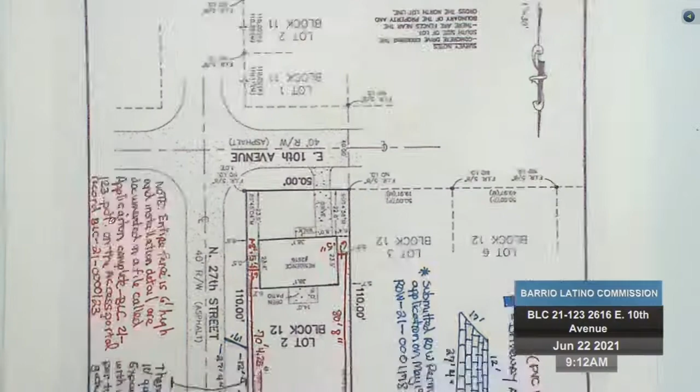So are you guys able to see this? Can you move it up? Yes. Maybe I can do this right here.

Okay, so this is a survey that I submitted as part of my application, and it indicates in red where the existing fence is and where the new one's going to go, right in this place. You can see it's well inside the property line.

On the 110-foot side at the top, that's within the property line. There's another house right here, they do not have a fence, it's just my fence there, so that's also inside the property line. On the 27th Street side, the request is for it to also be inside the property line with the proper allowance for the easement.

The fence is standard, 6 feet high. I understand you can't do anything higher in that neighborhood residentially, and I'm okay with that. There's an existing gate, as Mr. Vila pointed out, that is about 110 pounds and has a couple wheels on the bottom, so moving it in and out is very difficult. I have a small recreational vehicle in the back, and I'm trying to get access to that from this street right here.

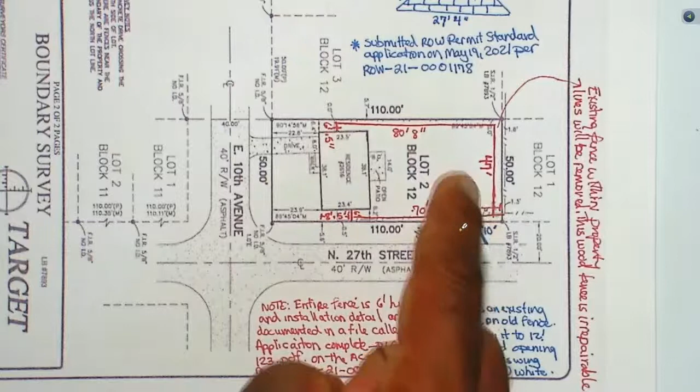So it's an existing opening, and I'm trying to enhance it with a better looking fence. Also, part of my application is to put in a driveway apron right there. As of right now, it's just grass and dirt on the easement.

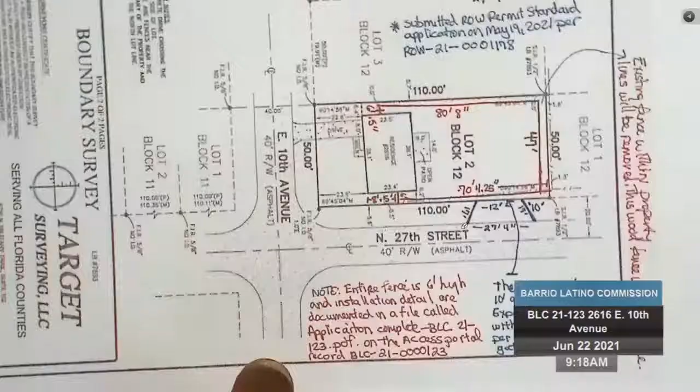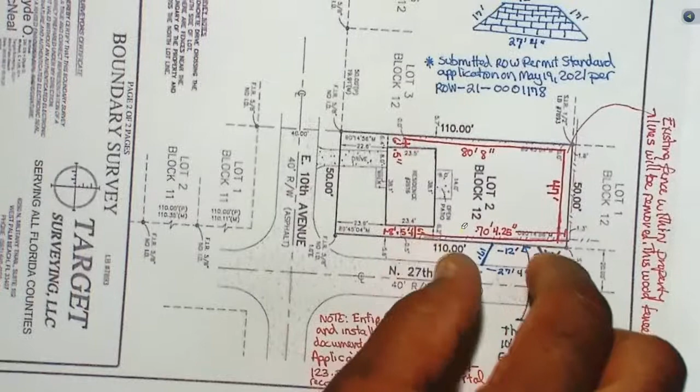The fence that's already installed would be here, coming off the house right here. This section is done, this section is done, and this section, about 8 feet, is done from the house coming out this way. Out of the 70 feet, 4.25 inches, about 60 feet of it is not done, and that includes the existing gate as well.

Okay, question. So this started 3.5 years ago, it's been that way, and you just kind of ran out of money to finish that last section and replace that wood fence section and gate that goes there to access your backyard? It's pretty deteriorated. Yes, sir, yes, sir, okay.

And once again, I was just unaware that I needed this type of approval, so I apologize for doing the work, but I just became aware of it by a notice that I needed approval, so that's why I'm here. Okay, and it looks like from your documentation that you submitted to the city for the permit to do the fence, but it just didn't go into the Barrio for review.

Right. Would you like to talk about your curb cut, the apron there that you're proposing, while you're at the mic? Yeah, absolutely. I'll put the survey back up. By the way, this does provide an illustration of where that gate is right here, the heavy one that's hard to move. This is where I'd like to put the driveway.

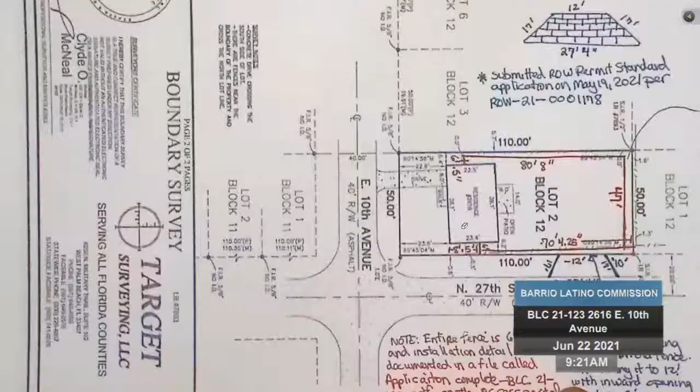And so from the survey here, you can see in blue down here, there's an existing 10-foot gate on the old fence, and I'm asking to expand it to 12 feet, so I will have 2 6-foot gates that will open. Should they open on the ends?

How do I have it here? The swing, 2 6-foot swing gates, and you guys tell me if I need to have it open from the inside or the outside. I think to the inside, but you guys will let me know. And then install an apron there.

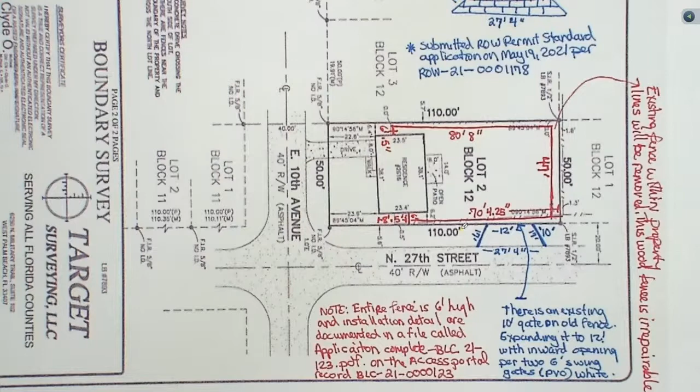The materials of the apron, I'm not committed to. If the commission requires concrete, I'm happy to put in concrete, I'm not stuck to pavers. It just was a more economical way to do it. But if I need to spend more to put concrete there to keep with the aesthetics of the neighborhood, I'm okay with that.

I've also requested a right-of-way permit for this driveway. I think they're requiring more details from me, such as a traffic site plan and other things. So that's in progress right now, that right-of-way permit to install that.

2013? I think, don't quote me on the date, but yeah. I thought it was fairly recent, but not in the last couple of years or anything.

Sir, how long have you owned the property? This will be 6.5 years. I bought the house about 6.5 years ago. So you're probably right around the same time it got annexed.

Okay, thank you. No, Rich asked most of my questions. All right, fantastic, and I have no further questions as well. So you've responded as the other commissioners asked their questions, but you have 5 minutes for rebuttal if there's anything else you'd like to add. No, just thank you for hearing my case, I appreciate it. All right, thank you.

So now we will close the public hearing, and then the commissioners will close the case. There's a part where we're talking quietly amongst ourselves, right? Is that what we're doing? So there's a part of me, to me, this is a no-brainer.

We have allowed PVC to go in previously, because that wasn't the discussion around what's happening. It's a product that's being developed now. It wasn't developed at the time the guidelines were established. It looks nice, it looks sharp, he's permitted it, it's legal, that kind of thing. To me, this is a no-brainer. I would be inclined to do the cement versus the pavers on the cut. But yeah, that's kind of my take on it right now.

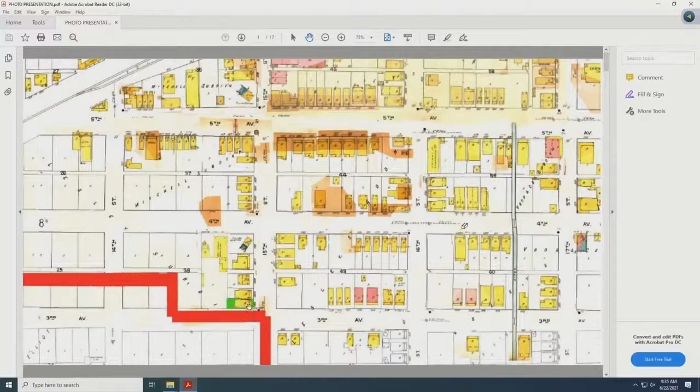Moving to the photo presentation, I always like to start with the 1929 Sanborn. You see the density here. This is part of our boundaries, showing that this is inside the local district of Ybor City. This is outside. The property in question is this small parcel here. To get a more global look, the red once again indicates the local boundaries. This is the one questionable property that we're looking at that is within the district.

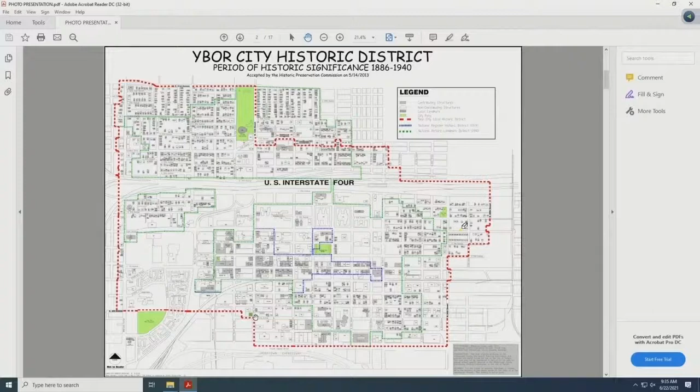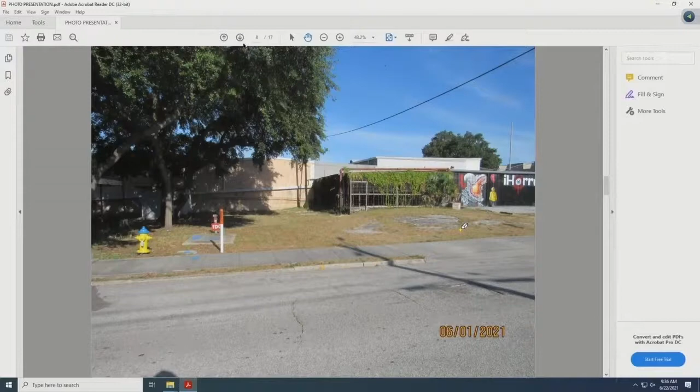Just a couple shots of the contributing structure that's there now. Looking at the surrounding area, this is to the north of that contributing structure, and a couple of structures to the south, so you get a feel for the environment. This is looking to the east. This is the dividing line — everything to the west of 15th Street is outside the district. This is to the east, inside the district. You see some outdoor storage and a Butler building, along with some contributing structures within the district.

These are some street shots. This is looking down 3rd Avenue to the west — the subject site is over here. This is looking to the east across 15th Street, again to get a feel for the area. This is looking down 15th Street to the north, showing the contributing structures I mentioned earlier. This is looking back into 7th Avenue, turning in the other direction. This is looking down 15th Street towards Adamo.

The property in question is here, and the dividing line of what's in the district is here. This is outside the district and part of what the applicant's going to show. Just to revisit, this is the contributing structure that's in the district, and these were the grouping of two little cottages also in the district. This was the dividing line down 15th Street — this is in the district, this is out of the district. But staff has some concerns since these abut the district line, so sensitivity is required. At this time, Tyler Hudson, the agent for the owner, will go through the presentation, and then I'll be back with some comments. Thank you.

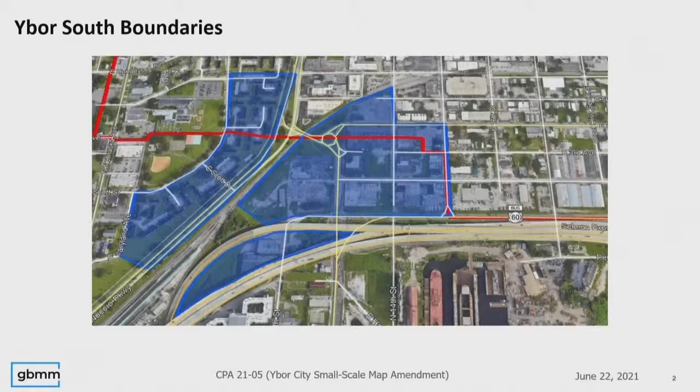But there are going to be many more hearings to come on this project. So that everyone has an orientation about where we are talking about, this is the general scope of the project. The portions west of Nuccio we generally refer to as the West Blocks. That's the site of the former Tampa Park Apartments. Those are subject to a filed rezoning that you'll have a recommendation hearing for sometime later this year. In the center, you'll see the Gasworks parcel, and to the east, what we sometimes refer to as the eastern parcels or the gateway parcels. In all of the map amendments we're talking about today, save for the one at the very south that's wedged between the expressway lanes, we're talking about the eastern blocks today.

Specifically, we're talking about the green outlined parcels. You can see the red is the historic district boundary, green are the parcels we're going to chat about. Just for organization, I'll talk about these as entirely separate. Number one is what is within the historic district. 2, 3, and 4 are varying degrees of outside, but I want to go parcel by parcel so this commission can understand what you can do now on this property under the comprehensive plan and what you could do if these changes are ultimately approved.

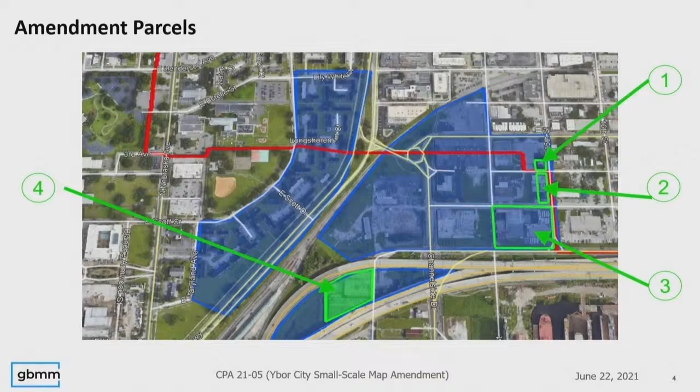Okay, let's start with number one. This is the project that's in the historic district. It's a 4,400 square foot parcel. It does have a contributing structure on it. I'll talk a little bit about that in a second.

As you can see, this block is divided between predominantly CMU 35 to the east. That is what we are seeking to go into mixed use. On the western side of the block, the part that's red on top, gray on the bottom, that entire folio is a TECO substation. That candidly is a bit too large, doesn't quite need all the land that it has, but that CC 35 is the red portion. Danny with the Planning Commission can speak to this, but CMU 35, which is that light purple color, and CC 35, which is red, are very, very similar plan categories. So what we're trying to do here is go from light industrial to what we believe is the most appropriate mixed use category by bringing what currently exists to the west eastward up to the historic district boundary.

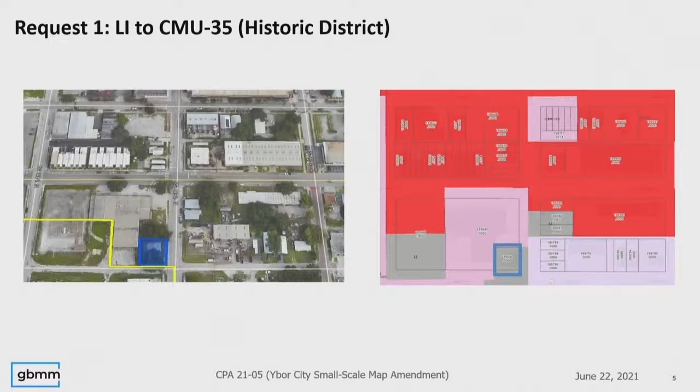Let's talk about the actual effect of that. Right now, being a light industrial land use classification, residential use is prohibited. So you could not build a house here. You couldn't put a townhome here. People cannot live here because of this light industrial classification. We think that is inappropriate, regardless of whether we had a project planned or not.

This portion of Ybor, certainly more people want to live in Ybor City. We're having conversations citywide about where folks perhaps want to inhibit growth. This is an area of the city that is appropriate for growth, both based on reality and the comprehensive plan.

So the effect of this would be that you could build up to 3 units based on residential density. You could also build up to 8,800 square feet of residential as well. CMU 35 for now allows you to build based on an FAR standard or based on dwelling units per acre. But perhaps most importantly, you're making this parcel a potential home for someone, because light industrial right now we believe is inappropriate for this specific parcel.

Before we talk about the other parcels, I want to have a brief interlude about the comprehensive plan. There are 2 features of the comprehensive plan that I think really bear on this discussion.

The first is tucked away on page 81, and it's a reference to what's called South Ybor City. It speaks to an area that's generally south of 3rd Avenue, generally in the Ybor City urban village. The parcels we're talking about today are south of 3rd Avenue, but they're not quite in the urban village, they're a little bit west of it. But again, I'm leaning a lot into that word 'generally' in the comprehensive plan. You'll note that it mentions increased interest in residential development and really the proximity to downtown.

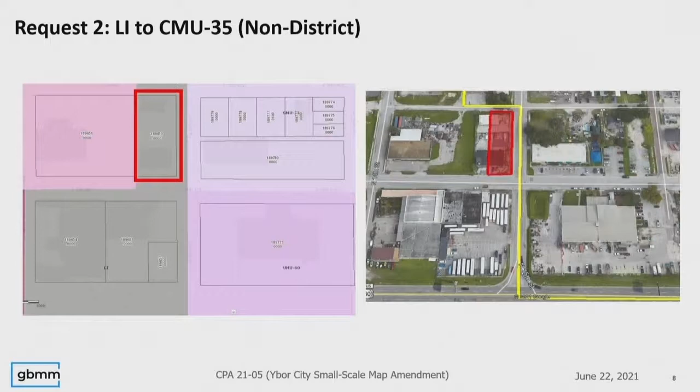In terms of the effect of this particular one, similar: you're going from a situation where residential is prohibited to one where residential is allowed. You're certainly allowing for more density and intensity. About 14 units can be developed standalone, up to 39,000 square feet.

One thing I want to comment on that applies to all the parcels - there might be some concern that, well, what if we want office? What if we want light manufacturing? What if we want some type of flex space? CMU 35 or RMU 100, which we're proposing for the further parcels, those uses are still permitted. So what we're really talking about here is getting rid of the type of industrial uses that, candidly, zoning was really invented in the early 1900s to separate from residential.

Next, let's talk about what we're calling Parcel 3. This fronts Adamo Drive, the northwest intersection of Adamo and 15th Street. Here we're proposing RMU 100, which is outside of the central business district, the most dense, most intense land use category.

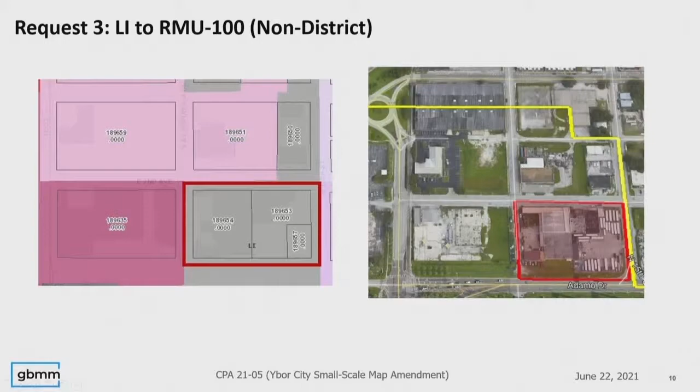You'll note that to the west you do have RMU 100. I do want to show briefly on the Elmo - the parcel that's hatched in black, that's what we are proposing, that's what it would look like if approved. The reason we think RMU 100 is appropriate here is because there's a continuation of RMU 100 to the south. That's the southerly continuation we talked about.

It looks like an enormous gulf between those parcels, and the reason for that is because Adamo Drive is an absurdly wide right-of-way. But in reality, you do have an adjacency of RMU 100 to the historic district there, and we believe that it's appropriate for this Adamo-facing parcel.

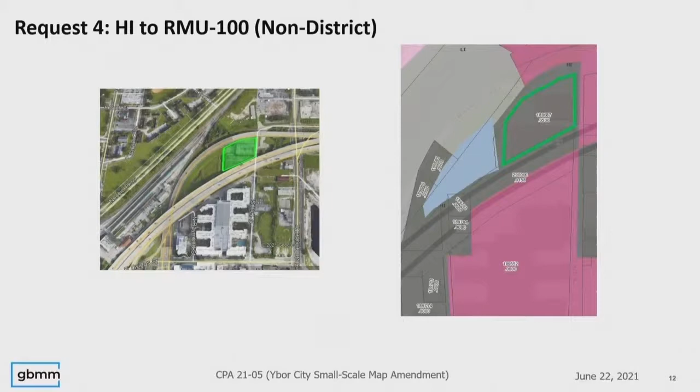Similarly, you'll see this parcel is surrounded by—if you look at the, do I press PC or doc cam? Just alert, there you go. Thank you.

You will see that parcel is also really surrounded by RMU 100, and we think that's an appropriate designation there. This is in a bit of a no man's land of different CRA boundaries and things like that. But while this is outside the scope of your perhaps eventual motion today, I want to make you aware that this is part of the application before you.

And then you can go back to the PowerPoint.

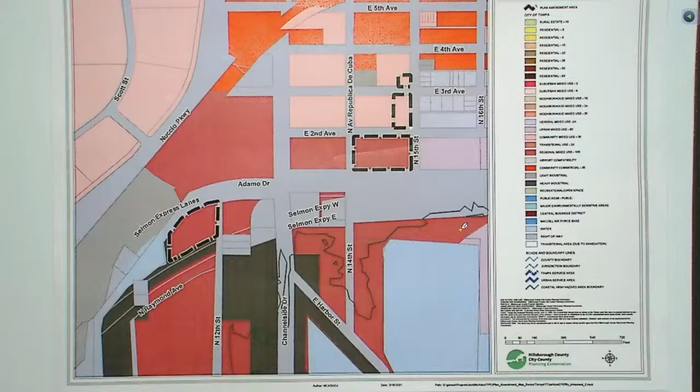I want to make two comments just to supplement the record, at Ron's request, and we're happy to do so. We are aware that there is a contributing structure on the parcel that is within the historic district.

We do not yet know what we are going to do with that. It is unlikely that structure is going to remain, but we are committed now to finding a relocation option. I can't guarantee that's going to be possible, but the owner of this property does own a fairly significant number of properties within the district, and we've talked about this, and we'll probably be back before you at some point to request a certificate of appropriateness for a relocation.

But I just want to put in the record that we are aware there is a contributing structure on site. The second point I want to make is that we are very mindful of the height restrictions in this YC6 district—it's 60 feet—and as Graham is going to talk about in a bit, we already have some preliminary massing ideas for what will eventually go on this parcel.

We will propose a rezoning eventually to a PDA/YC9, but Graham will talk about this later. We are very mindful of the historic district zoning guidelines, and we're certainly mindful about how the design guidelines can shape the future development we're going to be proposing.

Okay, so I'm going to stop for a second for a quick legal interlude. I'm about to ask Graham to come up and speak a little bit, and Kamari and I have spoken about this. What you're about to hear from Graham, I don't think it really has any bearing on your recommendation.

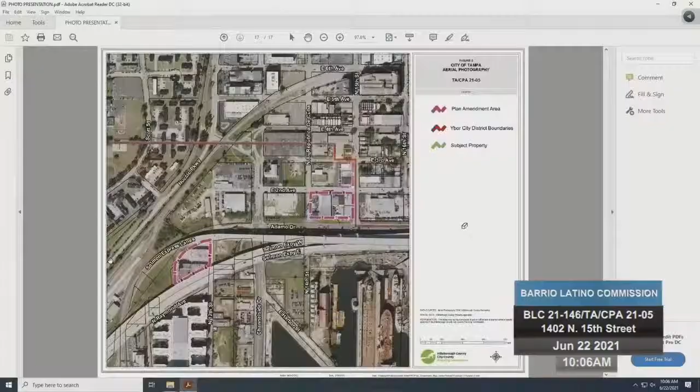Your duties and powers, once again, are under Chapter 27-95, with regards to this application for rezoning and changes to land use classifications or comprehensive plan amendment, to review and recommend reasonable land use changes to the extent necessary to preserve the historic integrity and appearance of the local historic district. Staff feel that this application is inconsistent with the objectives delineated in the City Code of Ordinances, Chapter 27-95(A)(2)(H).

This is the property we're speaking about. This is the one we're going to focus on this morning. In the Tampa Comprehensive Plan, Imagine 2040, there's language that protects the historic district along the periphery. So this was the line of the historic district, and this is the one you'll focus on this morning.

They're asking for a change from light industrial to CMU 35. The CMU 35 is a compatible change to the abutting property here. Along with the second box, the magenta one here, that's also CMU 35 they're asking for, so this is a compatible change as well.

Although it's not part of the request, it does abut the historic district boundaries, so it should be taken into consideration in staff's opinion. As you move down to the south, which flanks Adamo and 15th, you have the RMU 100, the most intensive land use classification abutting the crosstown, with some language that ties into it.

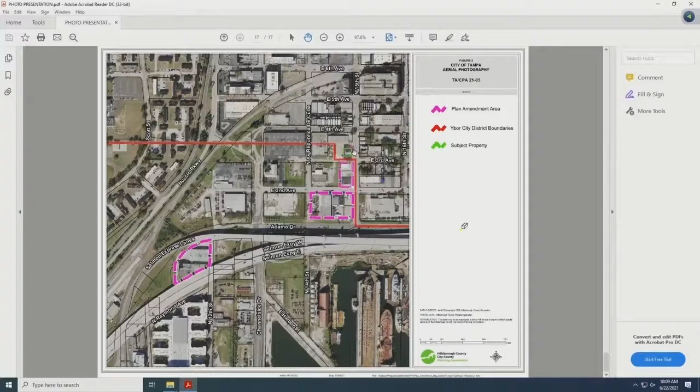As you put together your motion and language, be very concise and direct with your recommendation to council. You'll probably have to work on that a little bit.

We also have Danny Collins with the Planning Commission here. I believe he should walk up to the podium and address the board at this time. Thank you.

Is the projector working?

Good morning. This is Danny Collins with your Planning Commission staff. I was sworn in earlier. Today we'll be presenting Tampa Comprehensive Plan Amendment, TA/CPA 21-05.

This amendment consists of 6 folio numbers. The northernmost folio is within the local historic district — that will be the parcel you'll be reviewing today, the northernmost parcel on the map. The request is to change approximately 0.1 acres from light industrial to the CMU 35 designation.

Currently under the light industrial category, the site can be considered for just over 6,000 square feet of non-residential development. Residential cannot be considered under light industrial. The proposed amendment would allow for consideration of up to 3 dwelling units, or just over 8,800 square feet of non-residential development. The request would remove any potential for industrial uses on the site.

The Planning Commission reviewed the request and recommended that the amendment be found consistent to City Council. The item will proceed to City Council on Thursday, June 24th. This concludes my presentation; I'm available for any questions.

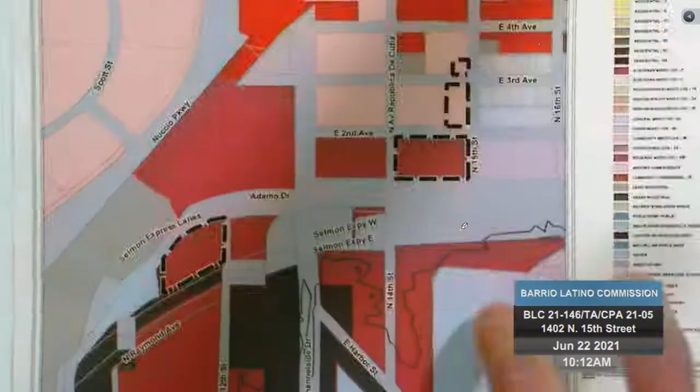So the Planning Commission likes purple. Tyler, can you indicate the more intense use, the RMU 100? Sure, Tyler Hudson, 400 North Ashley Drive. The darkest purple-red, I guess is how that presents there, at the northwest corner of Adamo and 15th Street.

That is the as-adopted version of the map, which is what we are requesting with RMU 100. As you'll see, this parcel has RMU 100 to the west, and it has RMU 100 continuously running to the south. We believe that outside the historic district, that is appropriate, in light of the fact that UMU 60 within the historic district would be seen as the absolute maximum that you could do that would be appropriate.

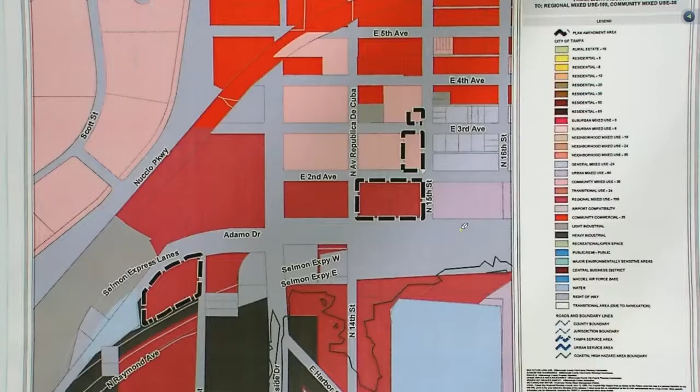But again, we are not asking for more than we need in terms of density here. RMU 100 is the most dense category outside the CBD, but we believe it's appropriate given that this parcel is located on Adamo Drive, which is an arterial, and also proximate to a high potential area of transit-oriented development that will come up in future hearings.

All right, thank you.

Seeing there's no one else here for public comment, there's no one to speak for or against this application. So I wanted to ask Ron to clarify his position a little bit, just because the way Tyler presented it was about changing from light use to CMU 35 on that one lot in the historic district.

But Ron, from where you say staff finds the inconsistencies, it's not on the actual lot that is asking to be rezoned, it's at the RMU 100, and since it's on the border of the historic district, you're looking to ask for a compromise, as part of our recommendation, whether that should be considered UMU 60 instead. That's correct. If you look at what's here, we're comfortable with the request that's here today.

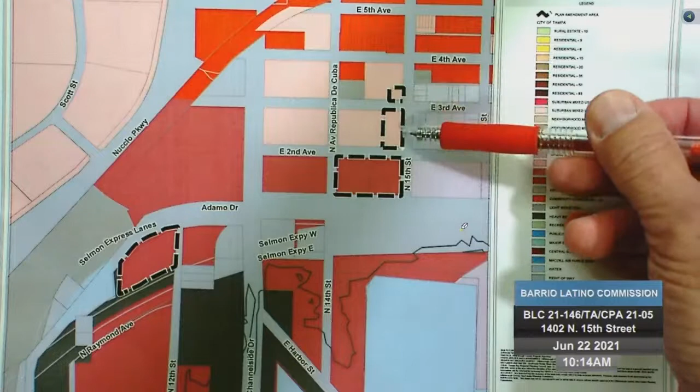The CMU 35 is compatible with the surrounding area, as well as the property indicated to the south, which is also CMU 35. The discussion this morning is about this parcel here. They're trying to blend it into what's to the west. The historic district is here. We're trying to blend it into what's to the east.

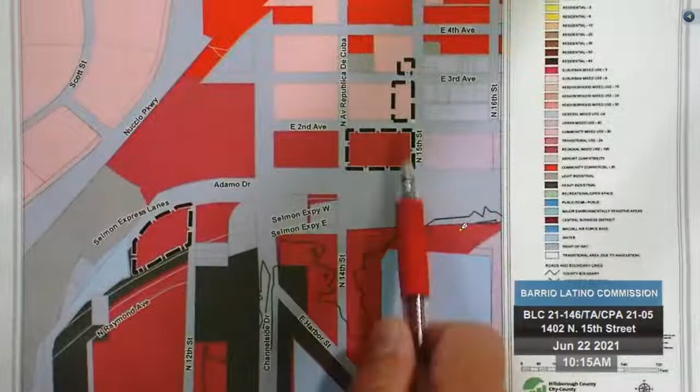And with the language that I read in the comprehensive plan, this could have a negative or adverse effect on the historic district. So we're looking within the district for compatibility.

All right, thank you. And is there anyone that can tell us the difference in terms of FAR and what can be developed between RMU 100 and UMU 60? Mr. Hudson should be aware of that information.

One second. Commissioner, were you specifically asking about the difference between LI and RMU 100, and UMU 60? Well, no, we know it's going to change, so between RMU 100 and UMU 60.

Sure. The difference is that UMU 60 has a base FAR of 2.5, and RMU 100 has a base FAR of 3.5. Both can be doubled if you're in the CBD periphery, which these projects are. From a residential density standpoint, if you chose to develop under that framework, that's where the difference is pretty material. UMU 60 has a base entitlement of 60 units per acre, while RMU 100 has a base entitlement of 100 units per acre.

And the problem is that given there's discussion about eliminating the ability to develop at FAR in UMU 60 and CMU 35, that could create a situation where you're essentially capped at 60 units per acre in the UMU 60 area, which means your average unit size would likely start at around 800 square feet, which we believe is inconsistent with the growing trend in this area for larger quantities of smaller units. That's why we're asking for RMU 100, and why we believe it's appropriate. I'll handle some other stuff in rebuttal, but if that answers your question.

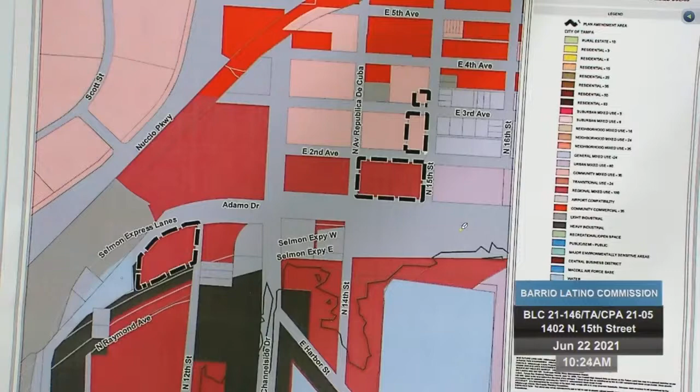Okay, thank you. The last question I have is for Maria. I kind of misspoke a little bit earlier when I said this is really only about one parcel. It's about all 3 parcels, and it's a recommendation that goes to City Council for a land use comp plan amendment here.

I guess legally, the only one that we have purview over is that one parcel on the northern side because that's within our district. The others get grouped into this motion because they're adjacent to the local historic boundary. That's correct, but what's most important is that there's one plan amendment. All of these are in one plan amendment going before city council. So yes, the smallest parcel is in the district, but the remaining 2 are abutting the district. That's correct, but there's only one plan amendment, and that's why we're talking about all of them.

Okay, and then same for the parcel by the Selmon Expressway? I don't think staff has any findings that it's inconsistent with the request, because it's furthest away from the district. What's of most concern are the parcels abutting the district. 2 out of 3, but the central grouping, yes, is one recommendation from this commission.